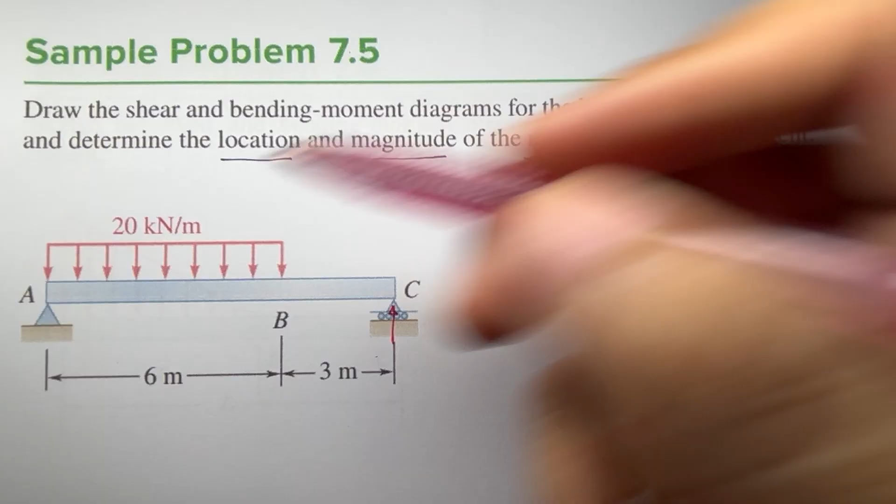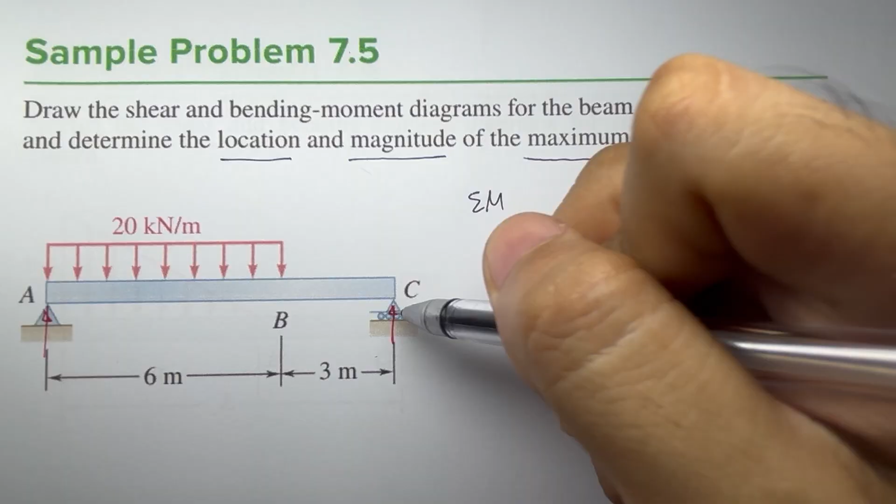Since we have no horizontal force, we have only AY here. To find the reactions of the support, we do the same thing: summation of moments. If you want to get the reaction at C, we can do summation of moment at point A. We have counterclockwise positive, so what are our forces?

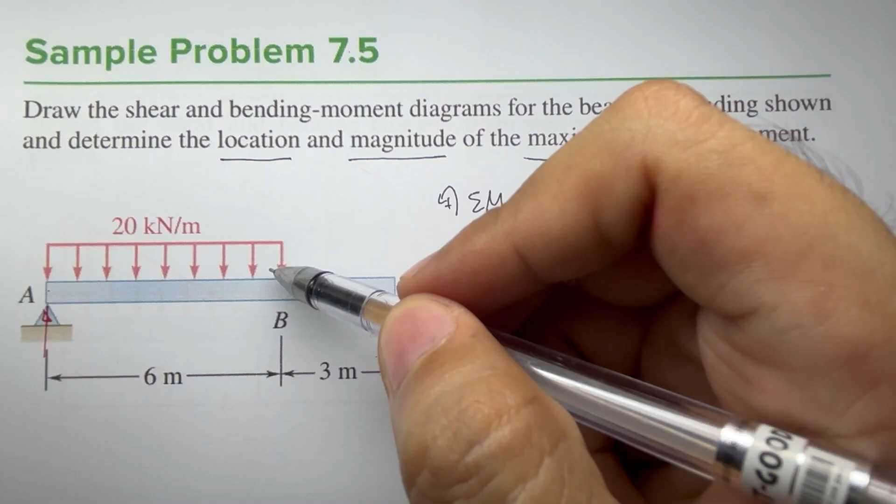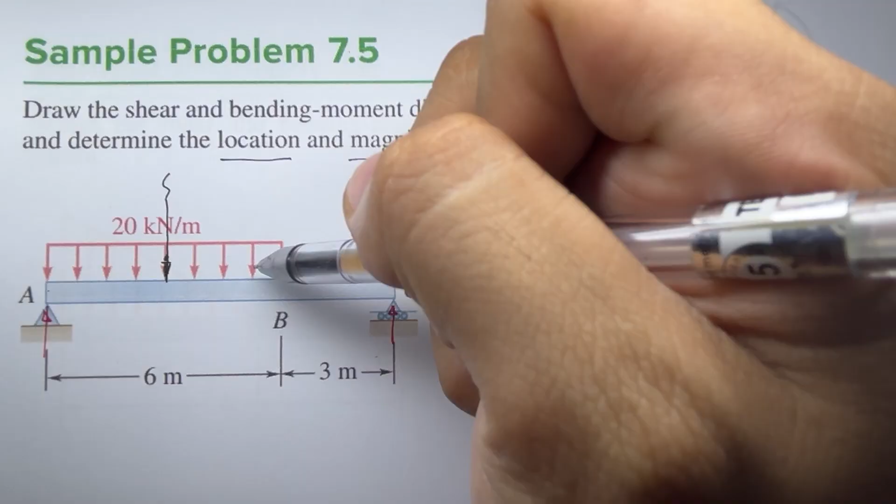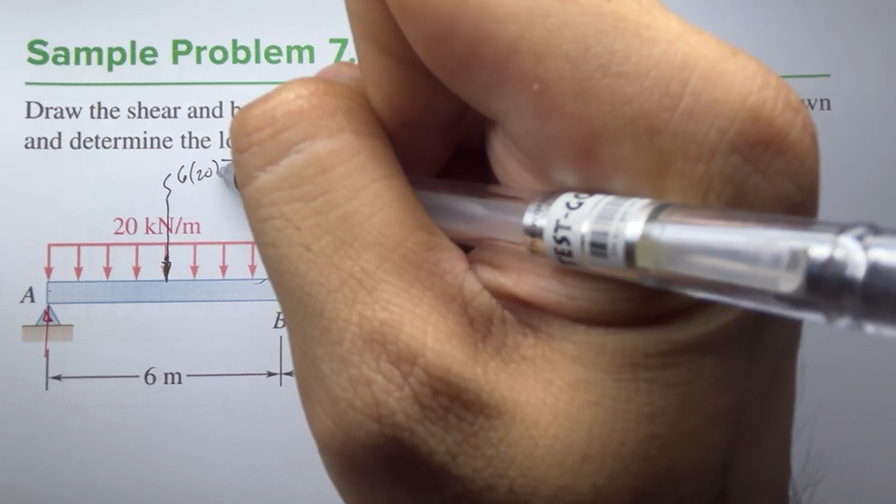This distributed load here, we can replace it with a concentrated load applied along the centroid. Since the centroid is in the middle, we can replace it with a concentrated load whose magnitude equals the area of the distributed load. The area is just the length times the height, which is 20, so 6 times 20 gives us 120 kilonewton.

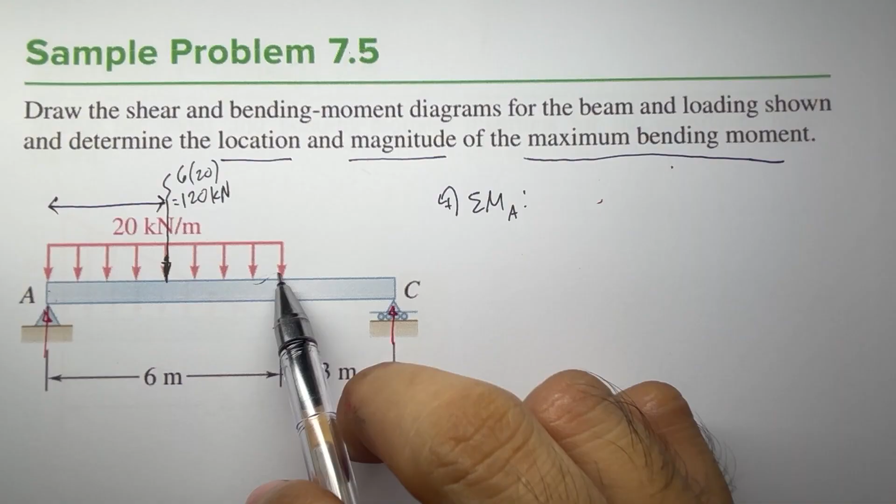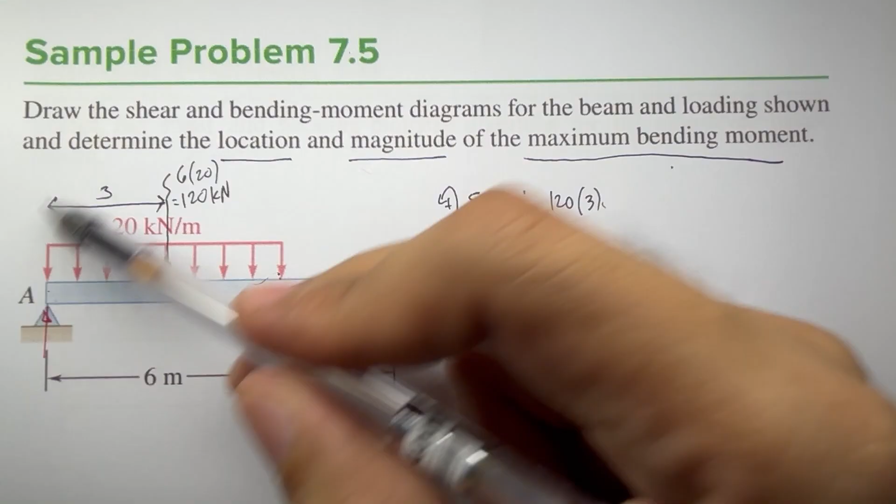The distance from point A: since the whole distance is 6, half of the distance would be 3. So the moment is 120 times 3, the moment arm. Since it's rotated clockwise, this one is negative. This one is assumed to rotate counterclockwise, so it's positive. C times its moment arm, we have 6 plus 3, equals 9, is equal to 0.

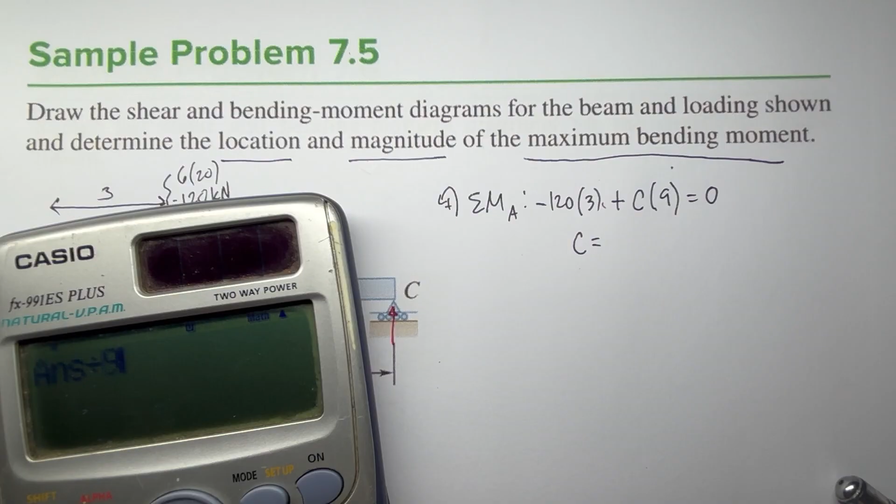Therefore C is equal to 120 times 3 divided by 9. We have 40. So the reaction at point C is 40 kilonewton, directed upward.

How about AY? We can use summation of forces along Y, positive upward. We have AY minus 120, then plus our C which is 40, is equal to 0. Therefore A is positive 80 kilonewtons, directed upward.

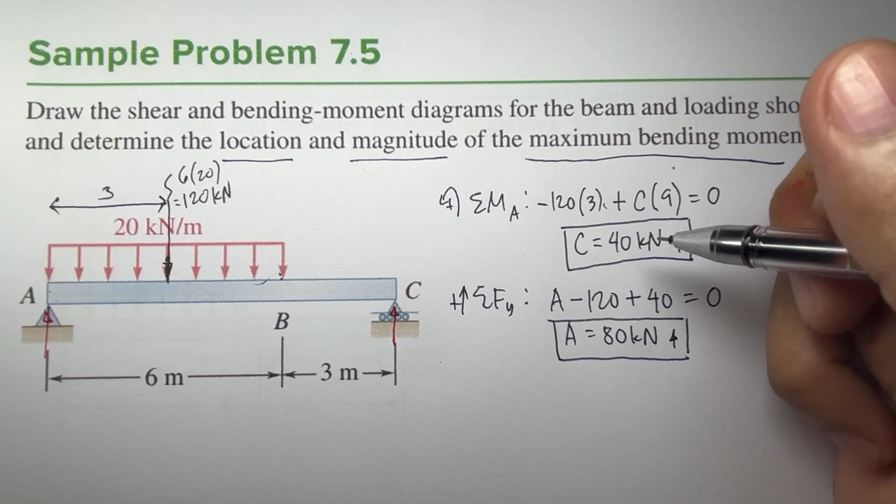Since we already know the reactions of the support, we may proceed to drawing the shear diagram. Here we have 40 kilonewtons and here we have 80 kilonewtons. In drawing the shear diagram, we need to extend this line here. Let's draw our shear diagram.

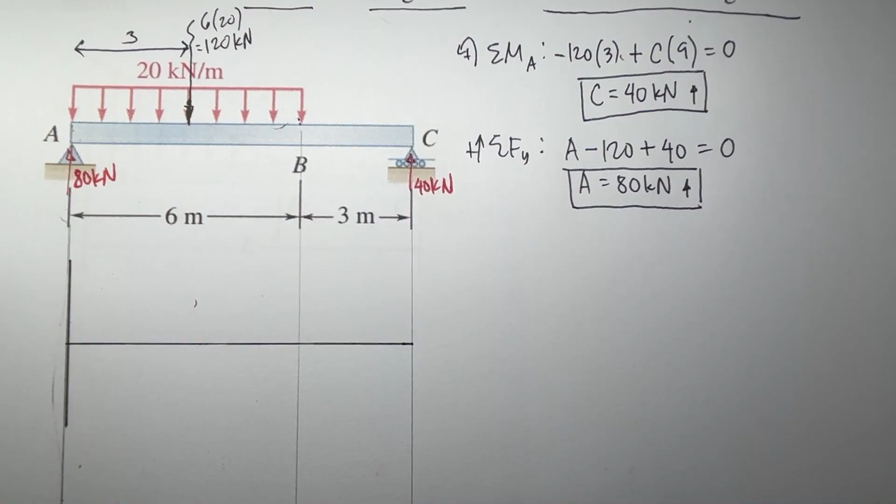So we have only two segments here: A to B and B to C. To find the shear at point B, VB minus VA is equal to negative the area under the load curve from A to B. What would be the area? The area here is just 120, so that is equal to negative 120.

How about the value at A? The value of A here, we have a shear of 80 kilonewtons. So we need to raise the shear at point A to 80. So we have VB minus 80 is equal to negative 120. So VB is just equal to negative 40 kilonewton.

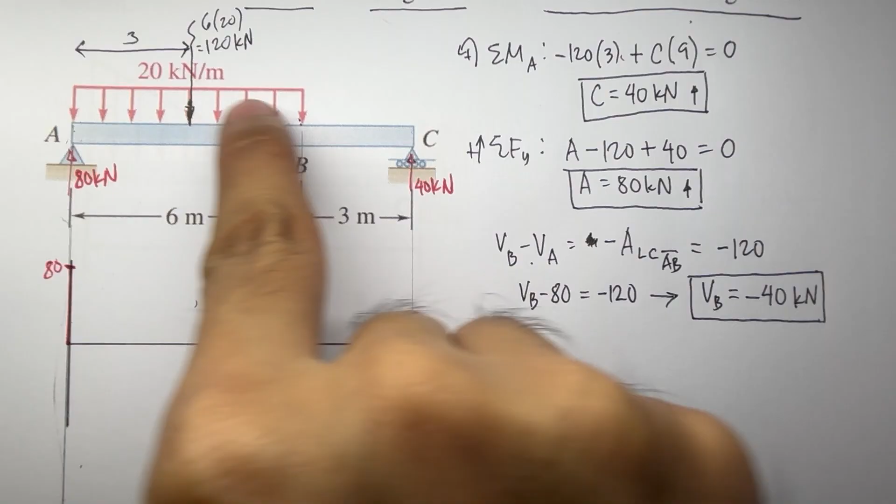So our VB here is somewhere here, negative 40. Since here we have a constant load, the next graph would be linear. So what we do is just connect these two points with a line.

Now how about VC? For segment B to C, we have VC minus VB is equal to the negative area under the load curve from B to C. What's the area here? We have no area, zero. So therefore VC is equal to VB.

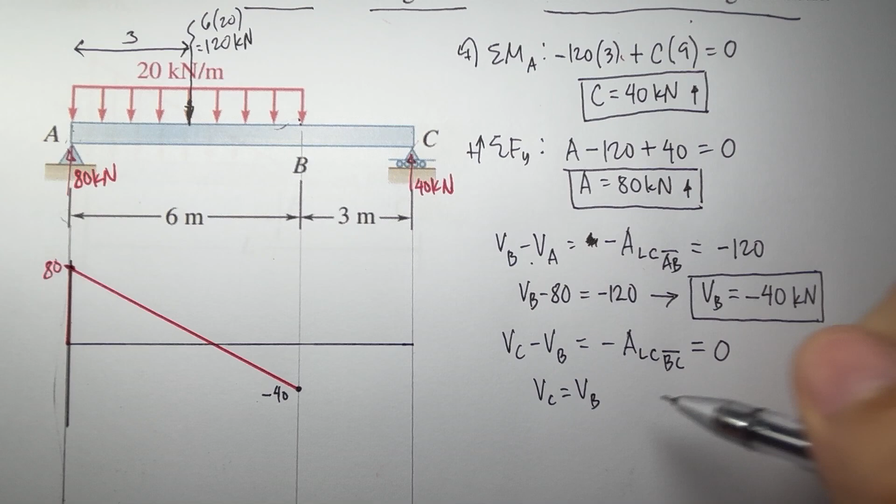And what's the value of our VB? VB here is negative 40. So we have VC equal to negative 40 kilonewtons. Or we can just directly draw a straight line here, constant, because if we have zero load here, the next graph is a constant or straight line.

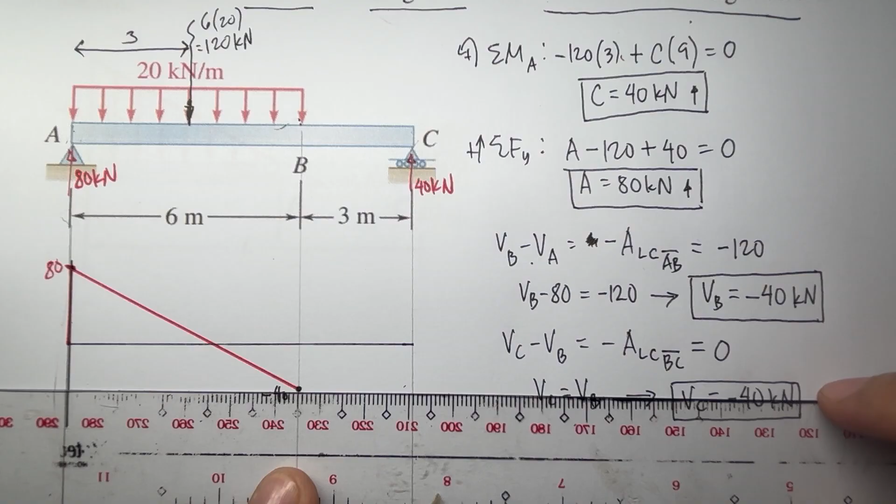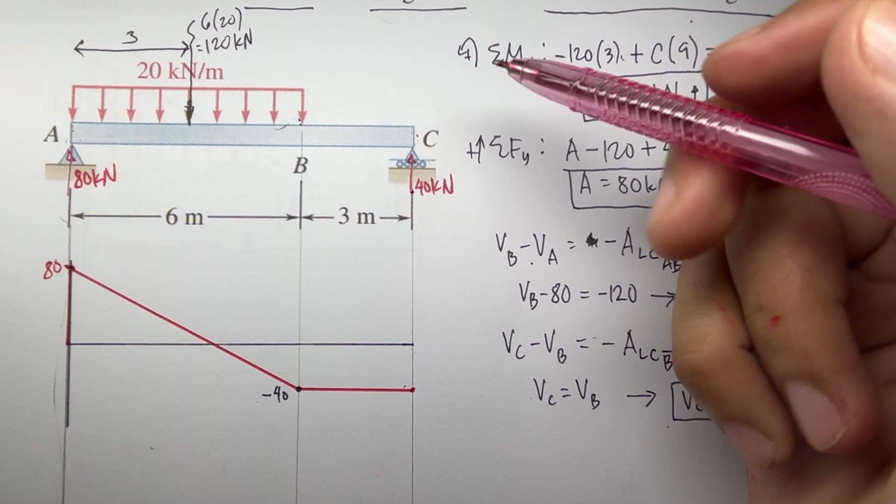So we only need to draw a straight line here. And then at point C, we have another shear going upward, 40 kilonewtons, so we go back to 0 at that point. So that's our shear diagram.

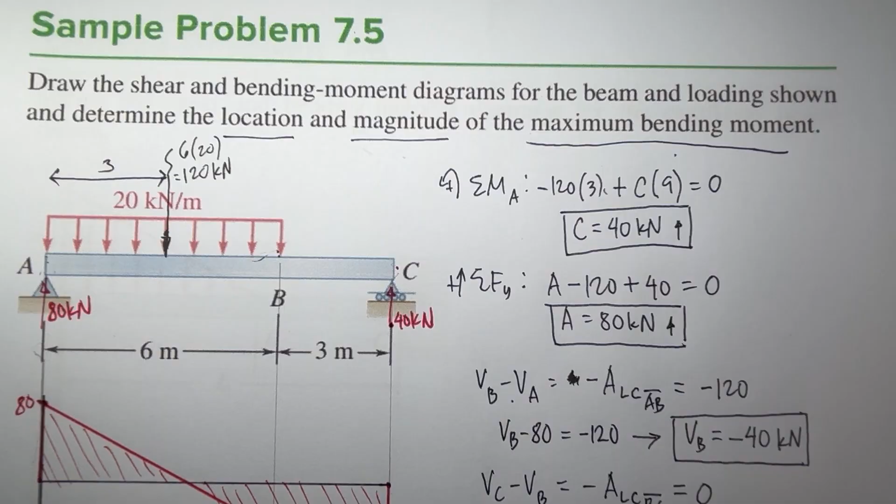Now what we want to know here is the location and magnitude of the maximum bending moment. Take note that our bending moment slope, dm over dx, equals the value of shear. If, say for example, this is our moment diagram, and our moment is defined by a function drawn like this, when can we say that our moment here is maximum?

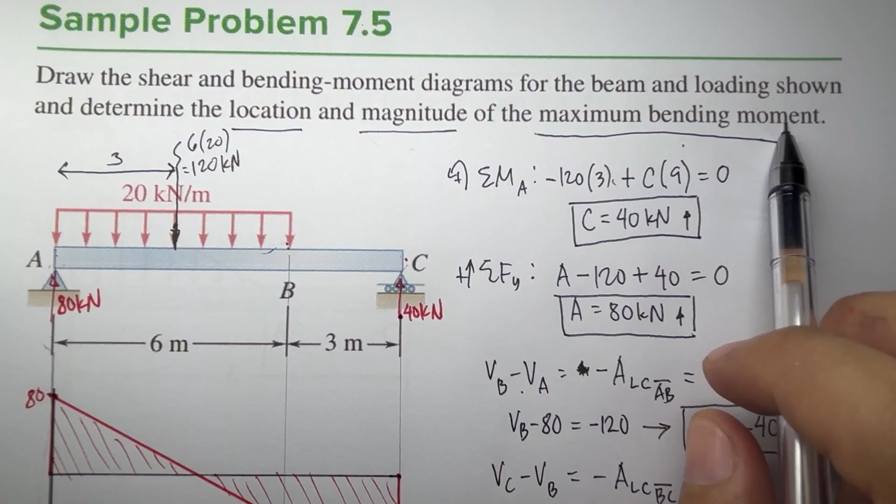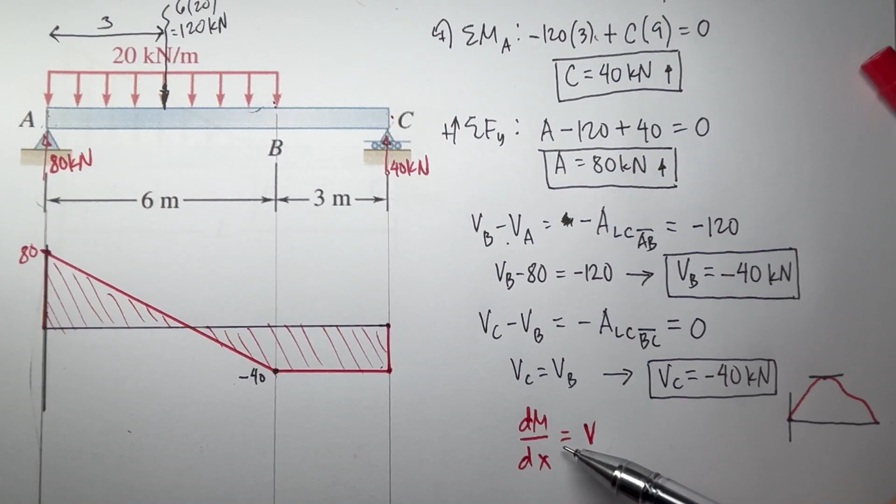That's what we try to look for here: the maximum bending moment, its location and its magnitude. If this is the graph of our bending moment, the maximum moment is located where our slope is equal to 0. Therefore, the expression dm over dx, which equals v, means the moment tends to be maximum when the slope is equal to 0. Therefore, the value of our v here should be 0.

When our V is 0, the slope in the bending moment diagram is 0. And when the slope in the bending moment diagram is 0, that point is our maximum bending moment. So at what point in our shear diagram does our shear equal 0? As you can see here, our shear that is equal to 0 is at this point.

So we need to know the location of that point, this distance here. So how do we get that? Let's say this point here is point D, and this point here is point A. If we project that to our load curve, we get this area here from A to D. In order to know the distance x here, we apply the formula.

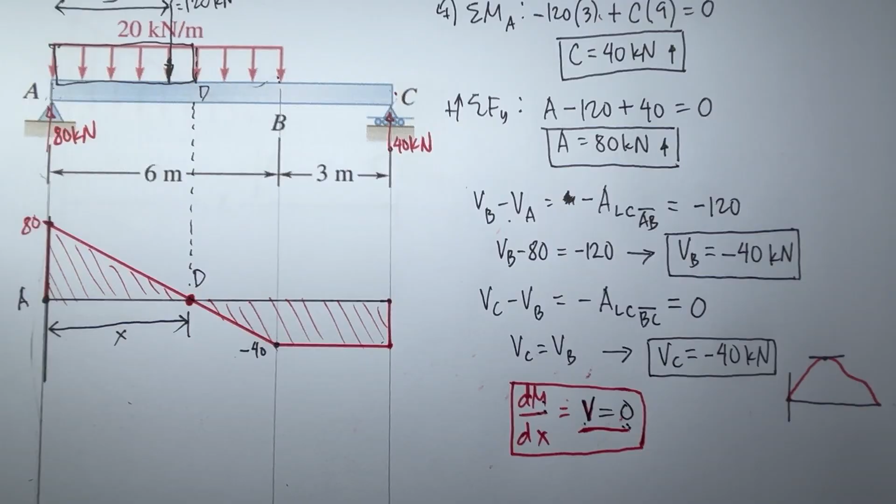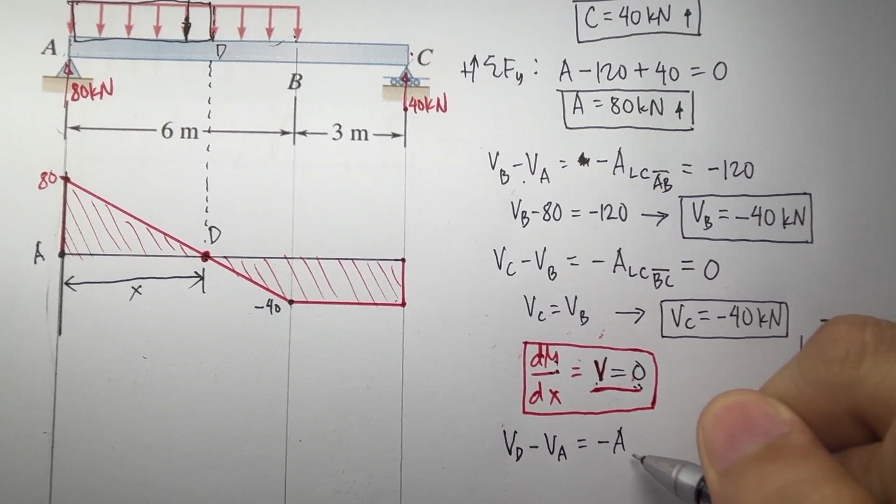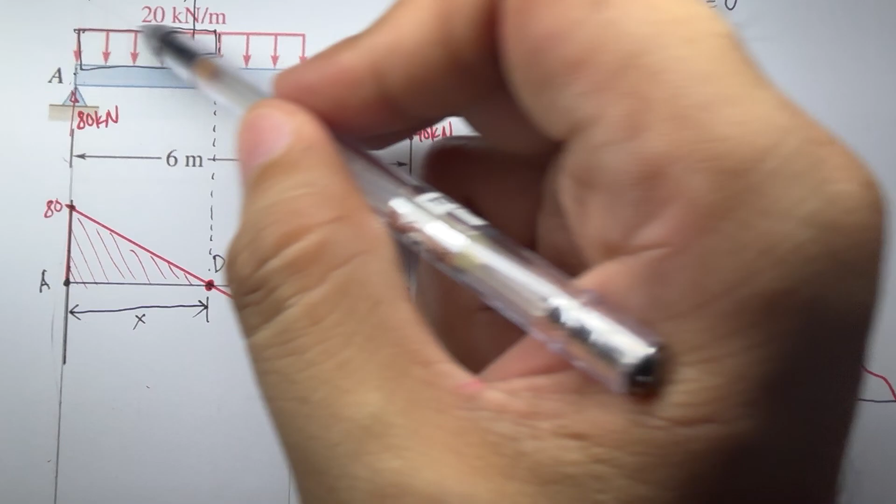So what is the area of this one? That is just base times height. What will be the height? 20. What would be the base? We have x. So the value of VD here is 0.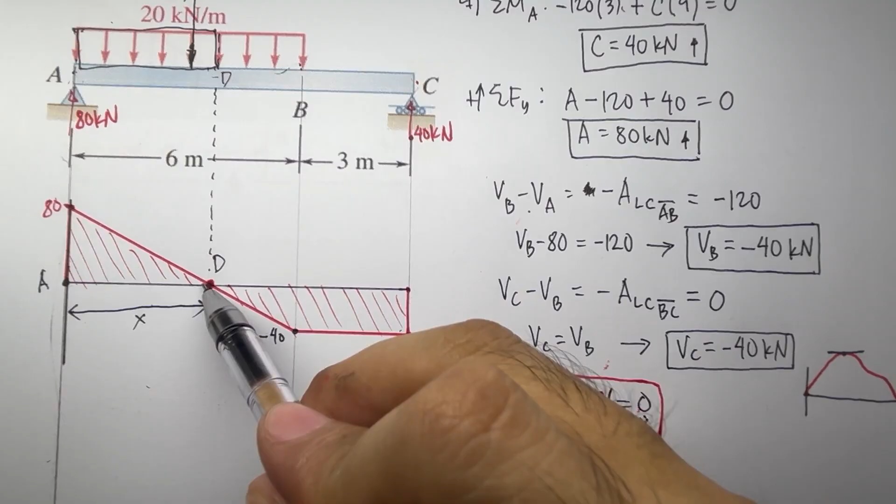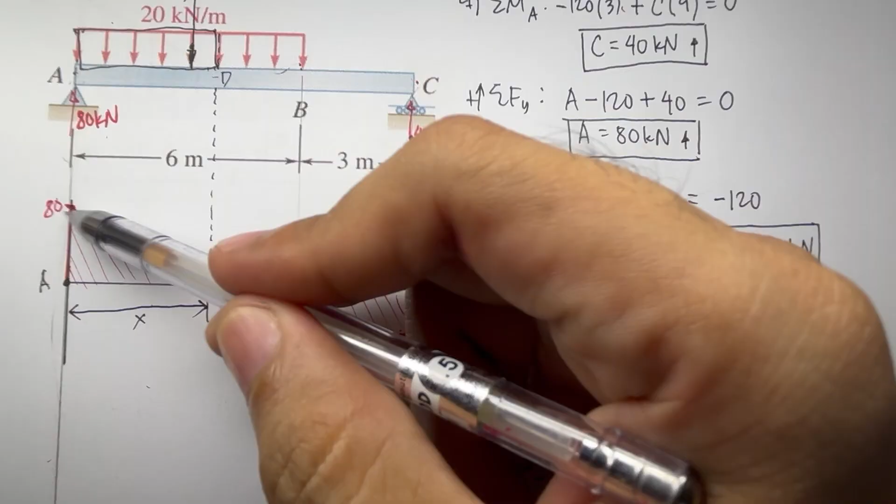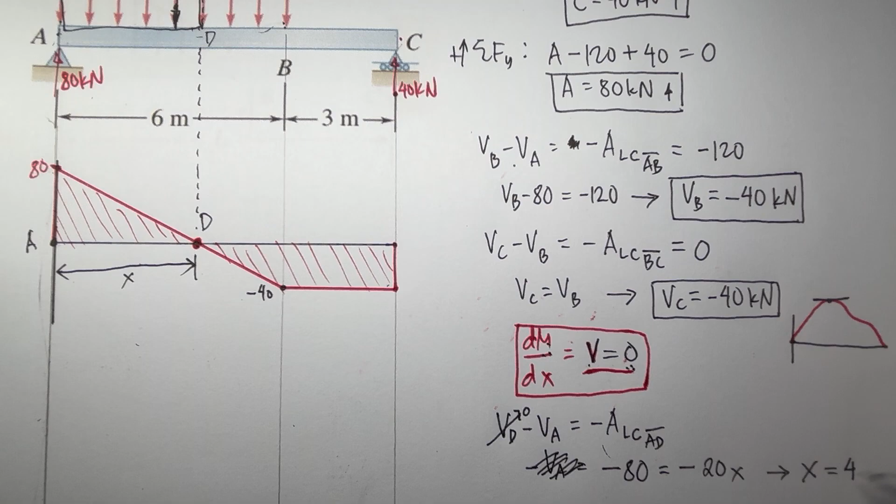So we have negative VA is equal to... base lang muna natin dito. What is our VA? Our VA here is 80, equal to the negative of the area here, which is 20x. Therefore, our x here is equal to 4.

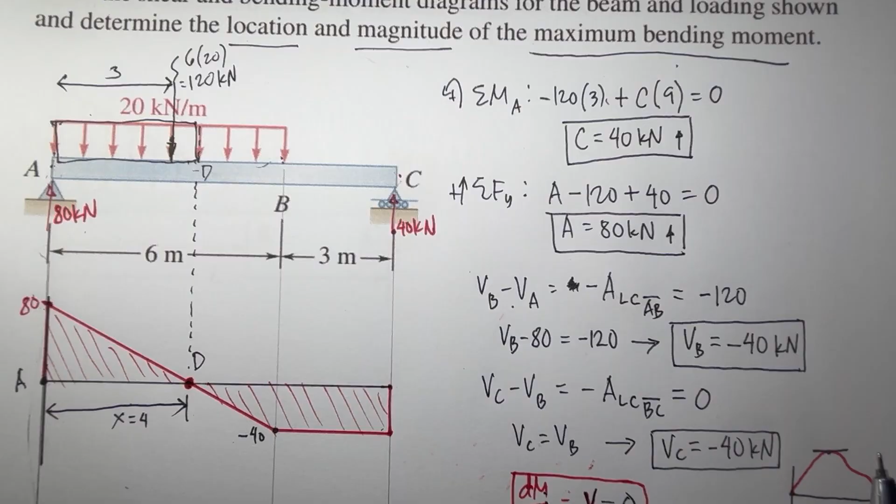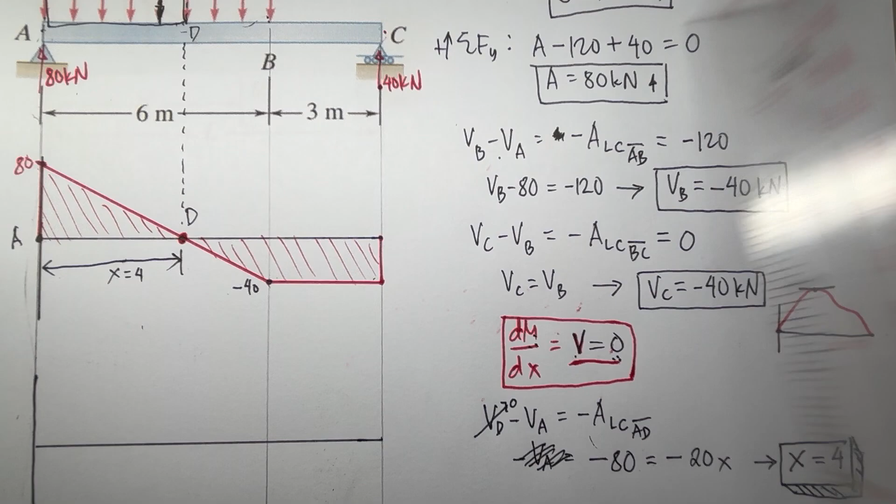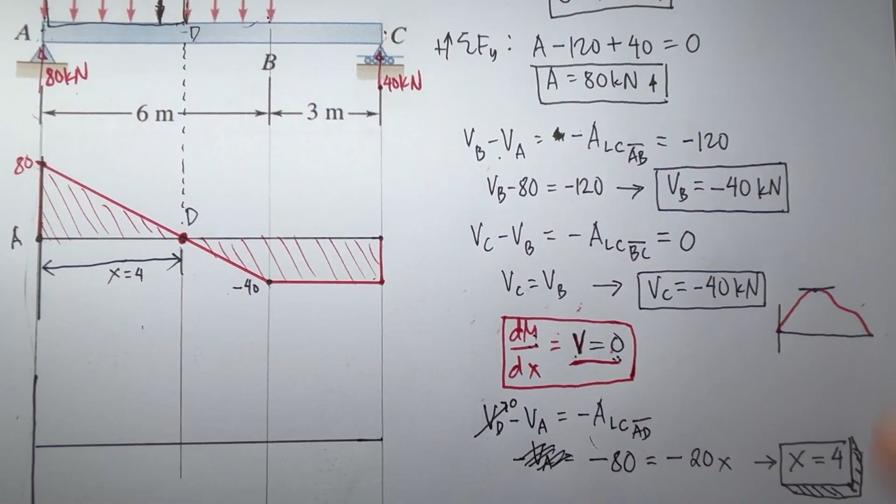So now we already found the location of the maximum bending moment. How about the magnitude? In order to find the magnitude, we need to draw the bending moment diagram. To draw it, we have two segments, segment AB and BC. Actually, we now have 3 segments, because we must include this one here since that is where our maximum bending moment is located. So let's apply our formulas.

By the way, this distance here is 2, and this one here is 3. Let's apply the formulas. Since we have 3 segments, A to D, D to B, and B to C, we have MD minus MA is equal to the positive area under the shear curve from A to D.

We also have MB minus MD is equal to, this is not negative, it's positive area under the shear curve from D to B. And then also MC minus MB is equal to the positive area under the shear curve from B to C. So here we have MD minus MA.

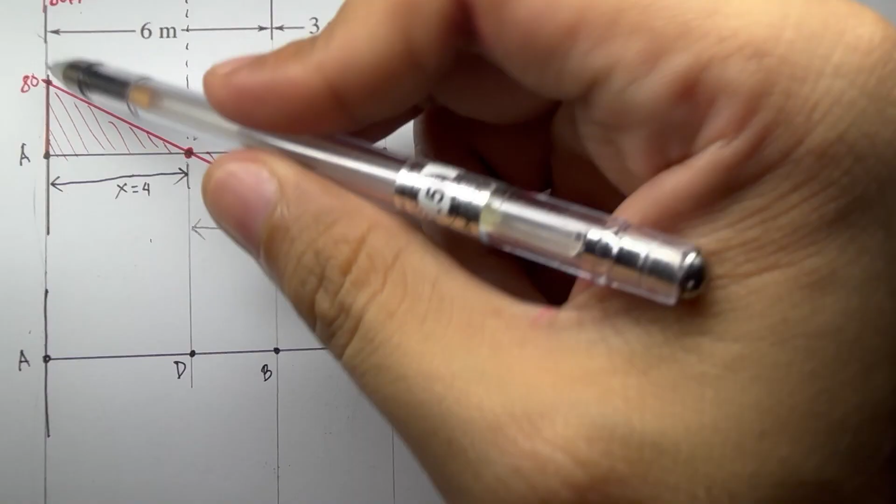We know that at point A, we have 0 moment, so this one here is 0. How about the area? Area of the shear curve from A to D. The area of this triangle is equal to 1/2 base times height, so we have 1/2, the base is 4, and the height is 80. That is equal to 160. Therefore, our MD is equal to 160 kilonewton meter.

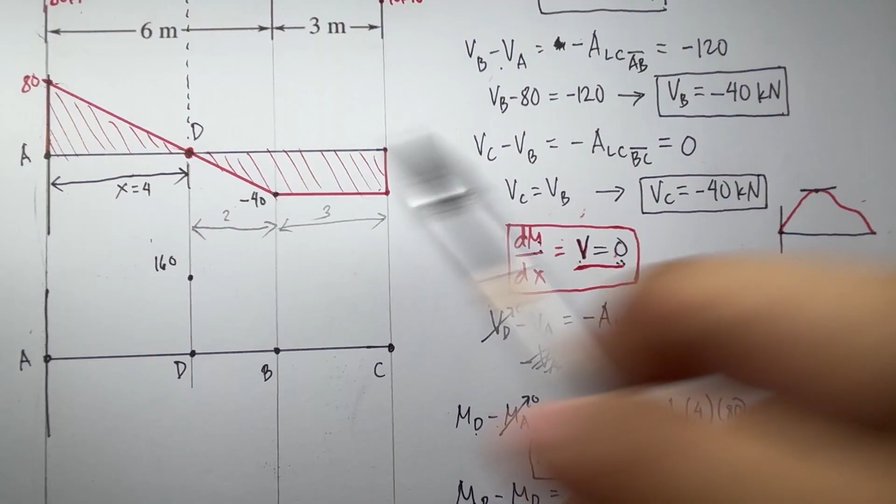So this would be the value, the maximum magnitude of the bending moment. Say this is located somewhere here, we have 160. Since it's decreasing and it's linear, the next graph would be quadratic and frowning, or concave downward.

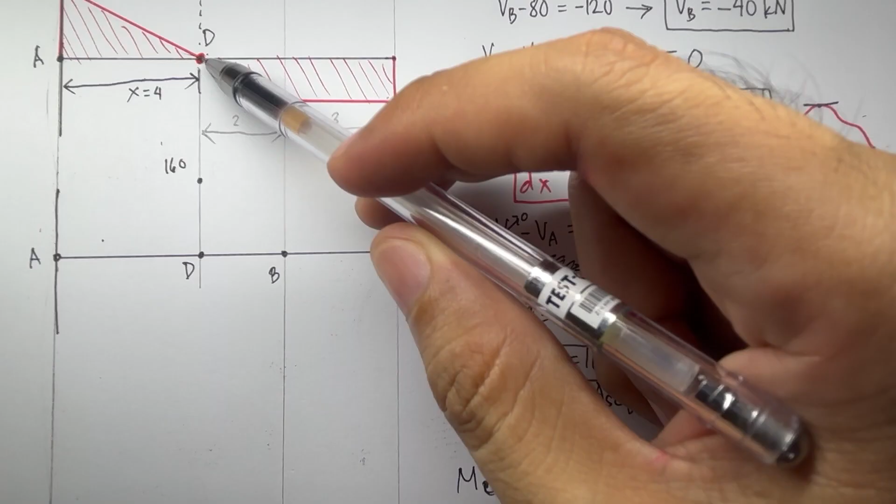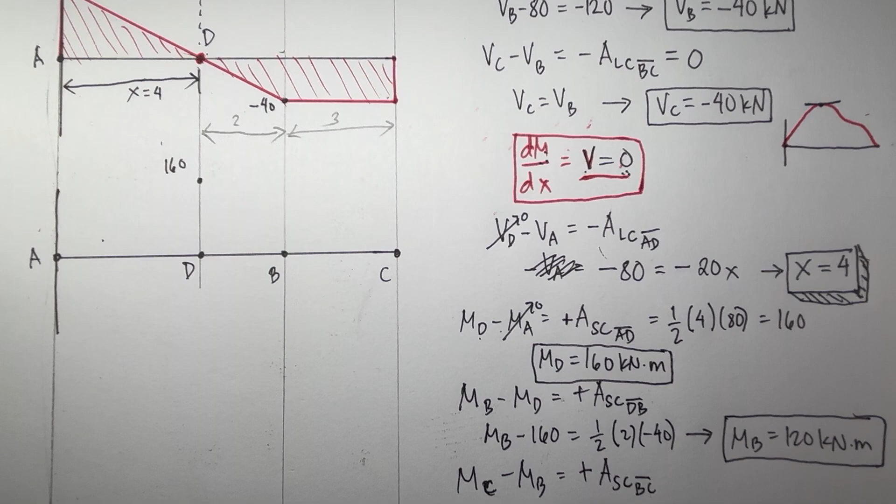How about here, the next MB? We have MB minus the value of MD, which is 160, is equal to the area under the shear curve from D to B. This area here is triangle, so we have 1/2, the base is 2, and the height is negative 40. So we have 2 times negative 40, giving us MB equal to 120 kilonewton meter. Say this point here.

And since it's decreasing and it's linear, the next graph would be quadratic and frowning. So lastly, we have MC. MC minus MB, which is 120, is equal to the area under the shear curve from B to C, which is rectangular, so that is just base times height.

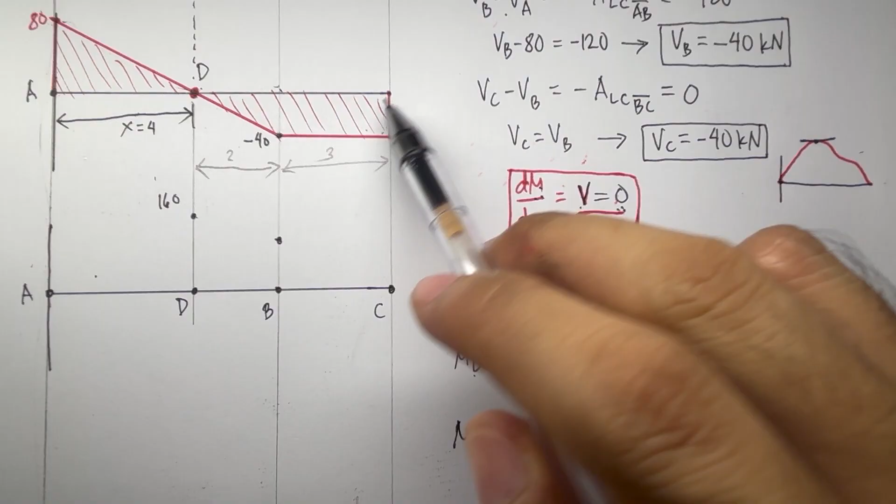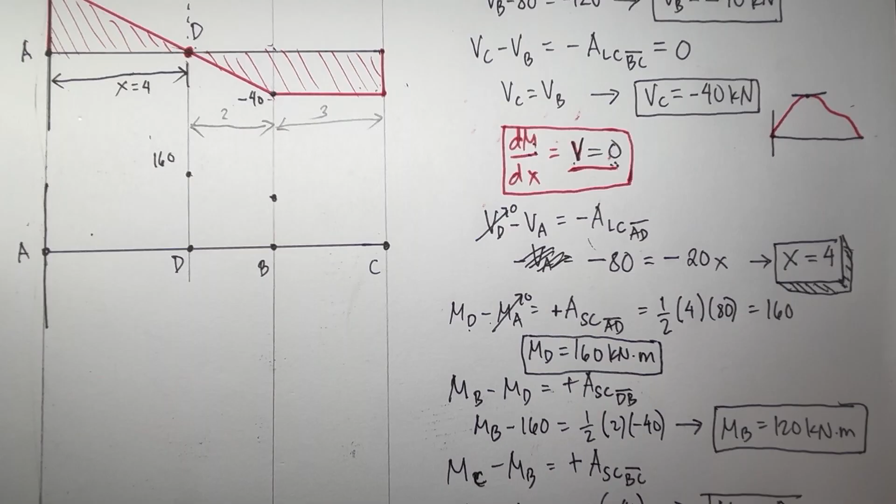The height is negative 40 and the base is 3, so we have 3 times negative 40. Basically that is just negative 120 plus 120. We have our MC equal to 0, so babalik tayo sa 0 diyan.

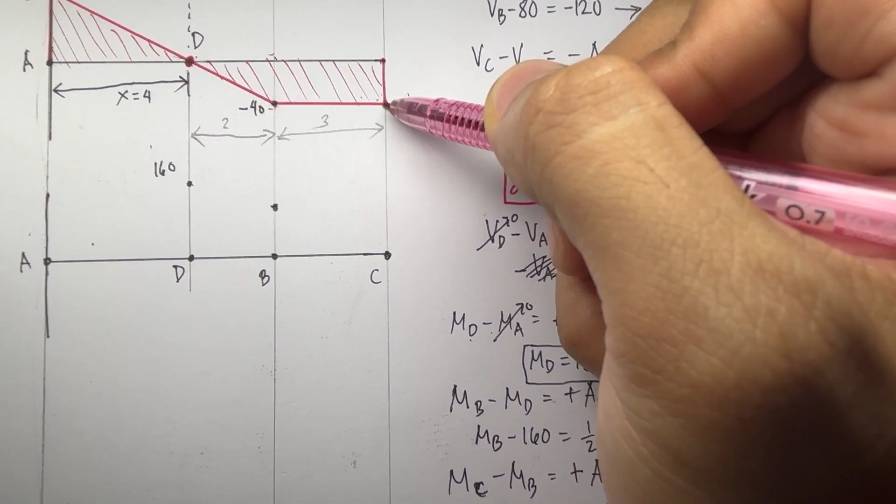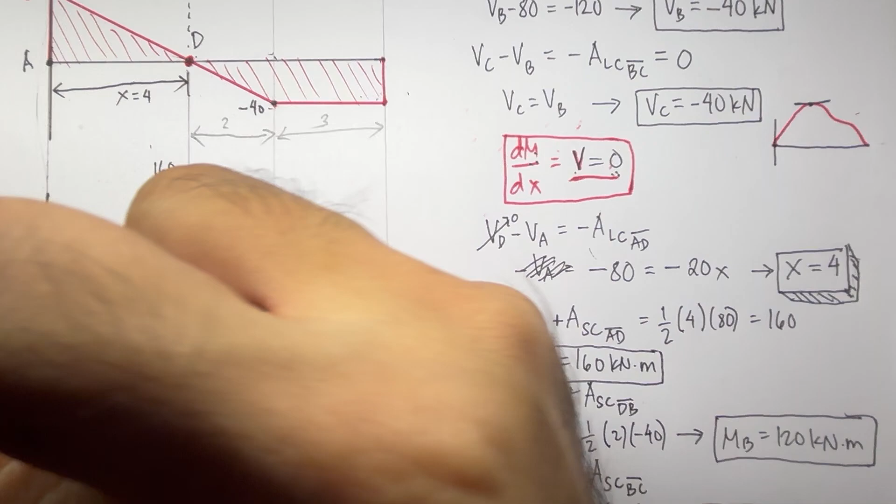Now to draw the graph here, if the shear curve is constant, the next graph would be linear. So let's connect this with a line. Then A to D and D to B is quadratic, so parabola. Connect this with parabola. So that would be the graph of our bending moment.

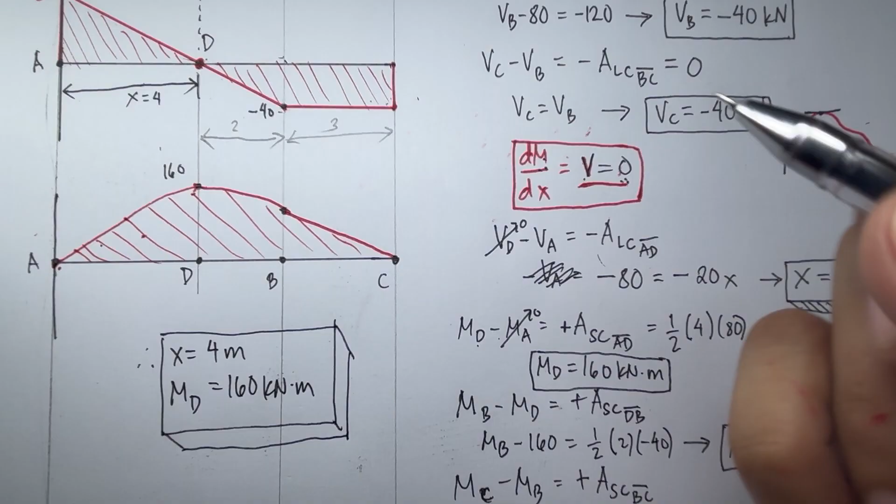So to conclude, therefore, the location is equal to x and the magnitude is equal to 160 kilonewton meter. This would be our final answer to the question about the maximum magnitude of the bending moment and its location.